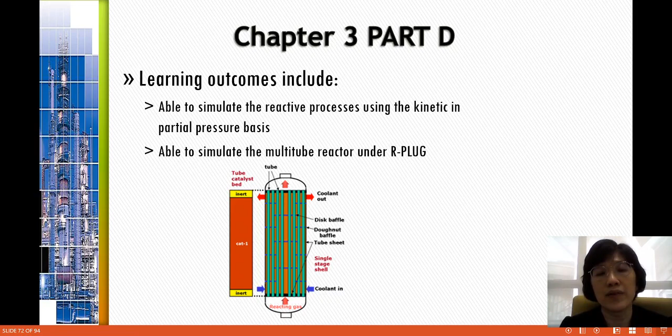Today we are in the last section for chapter 3 on the simulation of reactive processes. So for the last part of chapter 3, we have 2 learning outcomes. So let's refer to the slide. So the first outcome is you should be able to simulate the reactive processes using the kinetic in partial pressure basis. And second, you should be able to simulate a multi-tube reactor using the RPlug model in Aspen Plus. So referring to the figure below, it is actually a multi-tube reactor, and the tube in red color is actually one of the tubes inside the multi-tube reactor.

So the content for the lecture today, or for you to achieve the outcome today, is through exercise 3.7. So we have the case of glycerol dehydration. Okay, first to acetol, and then acetol will then be hydrogenated to propanediol. I think this case is similar with the case that is given in exercise 3.2, but in exercise 3.2 we'll be using only RStoic, and here for this example 3.7 we'll be using RPlug because it is being carried out in a plug flow reactor.

Okay. So as mentioned, there are 2 reactions as represented in equation 1 and 2. We have glycerol dehydrated to acetol. Acetol will then be hydrogenated to propanediol. That's why we need hydrogen in the process. So of course our desired product here is 1,2-propanediol. So the rate equation for these 2 gas phase reactions is given in equation 3 and 4. As mentioned, it is in terms of partial pressure basis. P is partial pressure in the unit of kilopascal. K is the rate constant in the unit of kilomole per meter cube per second.

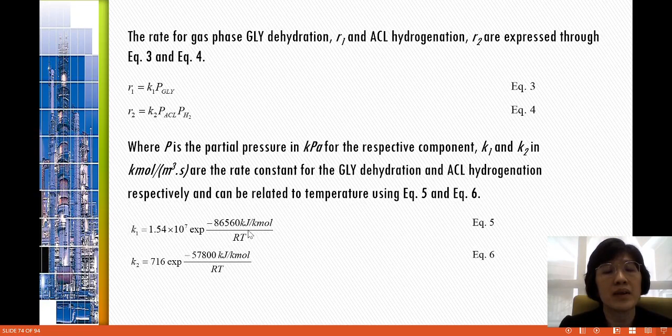So for the feed, the crude glycerol consists of 70% of glycerol and the balance of water, and it is feeding into the system at the flow rate of 1 kilomole per hour and mixed with 5 kilomole per hour of hydrogen before it is entering the reactor with the dimension of 5 cm in diameter and 200 cm in length. The feed temperature and pressure are 200 degrees C and 1 bar respectively, and the reactor is operated at the same condition as the feed.

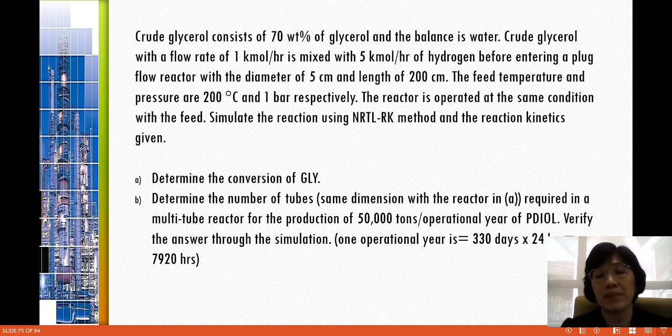Your task now is to simulate the process using the NRTL-RK method and determine first the conversion of the glycerol, second the number of tubes in a multi-tube reactor if you would like to produce 50,000 tons per operation year of propanediol, and with the number of tubes calculated, you need to verify the answer through the simulation. So there is a note given here. 1 operation year is actually equal to about 7,920 hours. How to get this number? We use 330 days multiplied by 24 hours because we assume 30 days, about a month, is used for maintenance purposes in the plant. Let's analyze the problem.

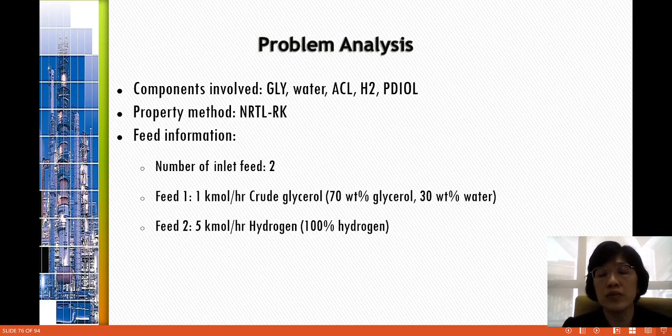So as usual, we have to list down the components. So the components involved are glycerol, water, acetol, hydrogen, and also propanediol. And the property method given is NRTL-RK, because I think it involves liquid initially, then we also have the vapor phase in the reactor. For feed information, there are two feeds. Feed 1 is glycerol, 1 kilomole per hour with the composition of 70 weight percent of glycerol, 30 weight percent of water. And feed 2 is pure hydrogen, with the feed flow rate of 5 kilomole per hour. So you have feed 1 and feed 2, meaning before entering the reactor you need a mixer.

So the reaction information given here is we have the rate equation in terms of partial pressure. Obviously this is a gas phase reaction, because normally when we have a gas phase reaction, the kinetic is expressed in terms of partial pressure. And we have to use RPlug here, okay, because the kinetic is given and it's a plug flow reactor. For the phase in the reactor we choose vapor-liquid because initially the glycerol is in liquid phase, but later on it is changed to gas phase in the reactor if it's in the real plant, right? At normal temperature and pressure, glycerol is actually in liquid phase. So to be safe, we choose vapor-liquid for the reactor valid phases, and the reactor operating condition is just the same as the feed.

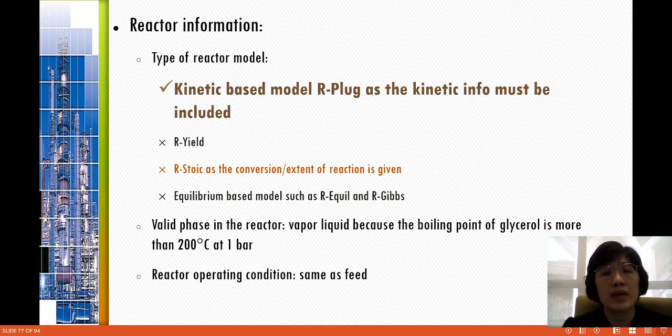Okay, now let's solve the problem. We have the first question: determine the conversion of the glycerol. So as usual, we have to list down the components, then we have to choose the property method.

So in the case where the reaction phase is not given, because in this question it's given, it's saying that the reaction happens in vapor phase. But if it's not given, you can actually check the boiling point of the components in the list of components. Okay? Under the list of components, you have to click review. Once you click on review, the properties table will be given to you, and TB here refers to the boiling point of the component at atmospheric pressure.

Okay, bear this in mind. This TB, the boiling point stated here, is actually the boiling point for the component at atmospheric pressure. So if the operating pressure is increased, then the boiling point of the component, of course, will be increased. You can also predict it using the Antoine equation if your operating pressure is higher than atmospheric pressure.

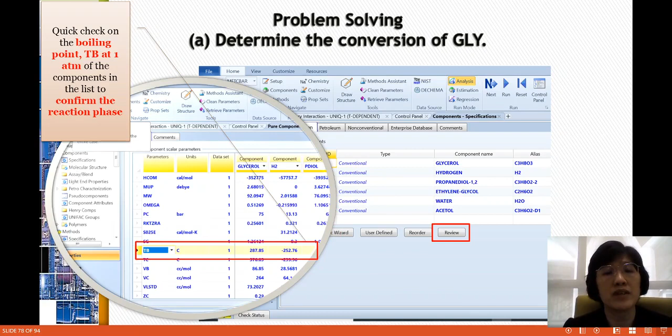So once you have done that, from the property environment you shift to the simulation environment. Here you have to construct the flow sheet. As usual, put in the blocks. As I said, you need a mixer to mix the crude glycerol with hydrogen before the feed enters the reactor, R101. You have to choose RPlug. Once you put in the appropriate blocks, you have to connect the blocks with streams. S1 here refers to the crude glycerol, and S2 is the hydrogen.

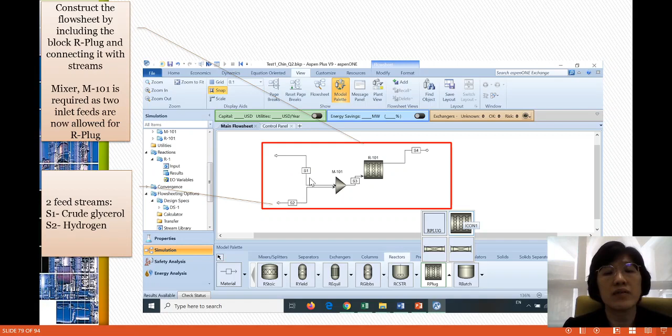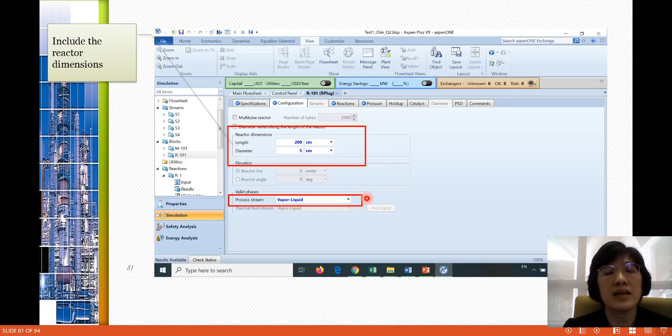Next, you have to include the reactor operating condition. You just choose that the reactor is operated at constant temperature, 200 degrees C, and no pressure drop, meaning the pressure of your reactor is the same as the pressure of the feed. Once this is done, you shift to configuration and put in the dimensions of the reactor. We have length and diameter given as 200 and 5 cm. The valid phase here, I have chosen vapor-liquid.

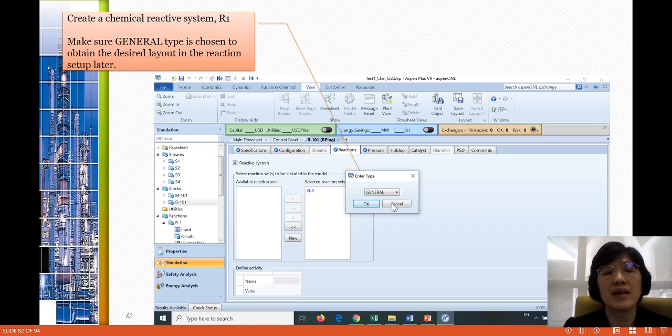Now you have to include the reaction details. Just click new and a new reaction set will be created, R1, and you have to enter the type. Make sure you choose the type general. Don't choose anything other than general. Once this is done, just click OK. If you don't know which step to go to, you can click the next button here. Then you'll be guided to this reaction 1 folder to include the reaction details.

As given in the question, there are two reactions. First is glycerol dehydration, second is the acetol hydrogenation. So just put in the chemical equations accordingly. One mole of glycerol produces 1 mole of acetol and 1 mole of water. For the second reaction, 1 mole of acetol reacts with 1 mole of hydrogen to produce 1 mole of propanediol, right? So PG here should be PDIOL. This is the old file; I copied from the old file. The new file is revised with PDIOL. Can you see this one?

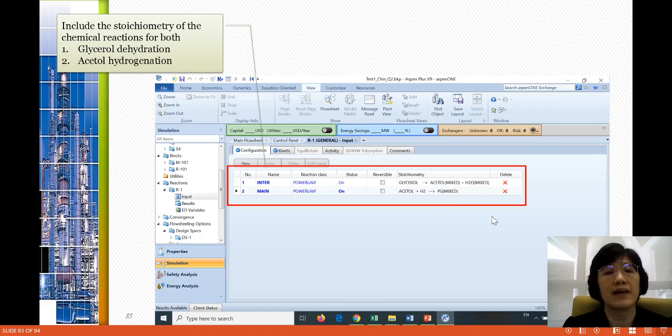Now, with the chemical equations given in the configuration tab, just click next. You will be guided to the kinetic section. There is a drop-down list with two reactions. The first one is glycerol dehydration. Just choose vapor phase, and the basis of the rate equation is partial pressure, remember, and the unit for your pressure is kilopascal. Make sure you have chosen the correct one, and the unit for rate is kilomole per cubic meter per second. You can just leave this.

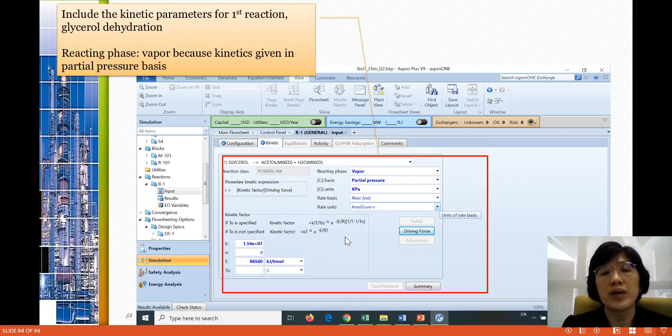And we have a K value given in the Arrhenius equation, the pre-exponential factor here, and also the activation energy given in the question in terms of Arrhenius equation. And once you have done this for reaction 1, you have to put the driving force, the order of reaction. It is first order in glycerol.

Okay. Once this is done, just close and include the kinetic for the second reaction, the acetol hydrogenation. Just put in accordance to the kinetic given in the question, and remember to put the order of reaction through the driving force section here. Remember to do this. And just to remind you, this is a very common mistake among the students. Students always forget to include the driving force, and this will result in a wrong simulation output.

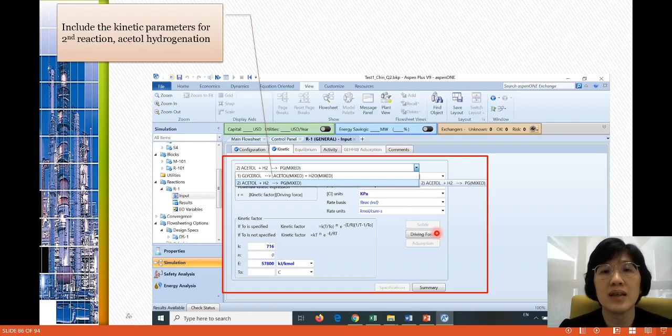So once this is done, remember our task is to calculate the conversion after the simulation. What you need to do is run the simulation, get the result under stream result. This is the stream result. Again, you have to check the glycerol conversion. Okay? Conversion is always referring to the reactant conversion.

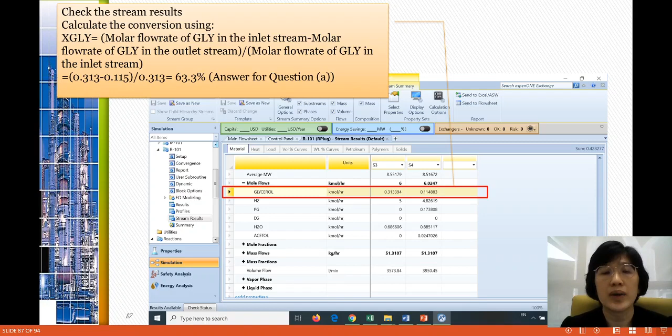So we have S3 and S4. This is inlet and this is outlet. S4 is the outlet stream. So glycerol here, we have the inlet stream for glycerol and outlet stream for glycerol. Just put into the equation for conversion, and the resulted conversion is about 63.3%. So this is the answer for question A. So let's move to question B.

You have to determine the number of tubes in a multi-tube reactor if you would like to produce 50,000 tons of propanediol in one operation year. Before you do anything, you have to change the number of hours in one operation year to 7,920. So just go to setup under the simulation environment, setup. So here there is a term called operational year. So just edit the number of hours here to 7920 hours.

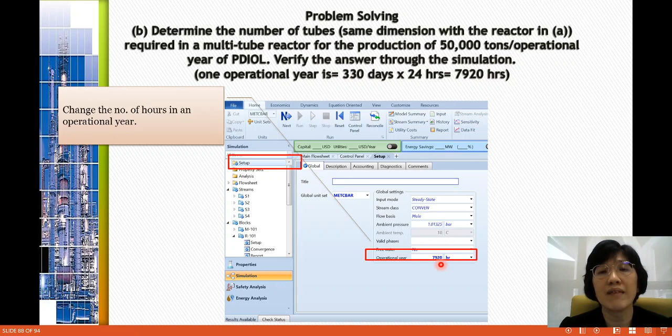Once this is done, then you have to go and check. I think before that you have to run the simulation again using the file just now. Okay, reset and run the simulation again. Then let's check the propanediol in one tube. Okay, and the unit, the mass flow unit is tons per operation year. So it is 115.467 tons per operation year if you use one tube.

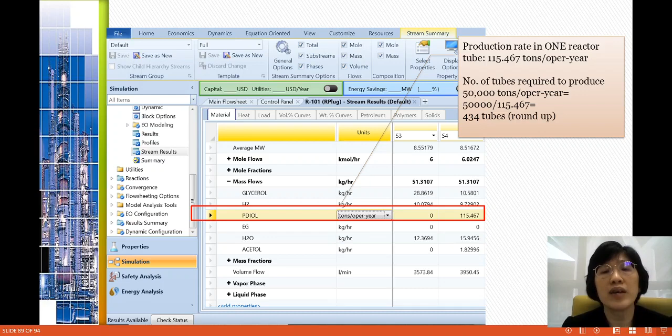Now you need 50,000 tons in one operation year. So you have to use 50,000 divided by 115.467. You get 433 point something. But we have to always round up because number of tubes must be a round number. So we round up to 434 tubes. So with this, we have to proceed to verify using the simulation. So meaning the answer is the number of tubes required to produce 50,000 tons of propanediol in one operation year is 434. So put this into the simulation and verify whether you can get this 50,000 tons per operation year.

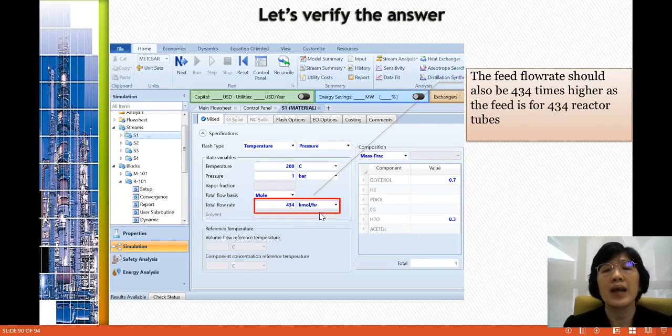Now, if you want to produce more, of course you have to feed in more, right? So make sure your feed flow rate now is 434 times higher than the original one. So for glycerol, instead of 1, now you have to use 434 kilomole per hour. And for hydrogen, instead of 5, now you have to use 2,170 kilomole per hour. It must be 434 times higher than the original.

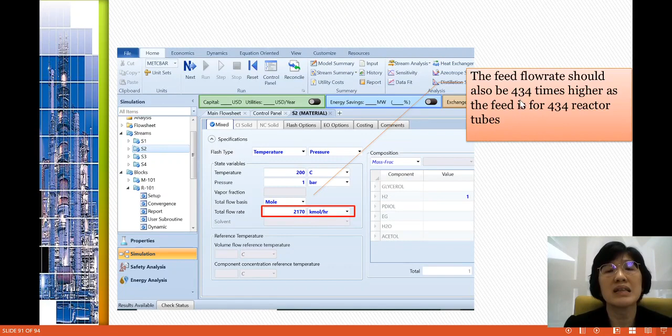And now, in the reactor configuration, you have to check the multi-tube reactor and then include the number of tubes here, 434. Okay, the rest is the same. So with this, I think all the required info is completed. Just run the simulation and check the result. So under the stream results, again under the block of reactor R101, check the result.

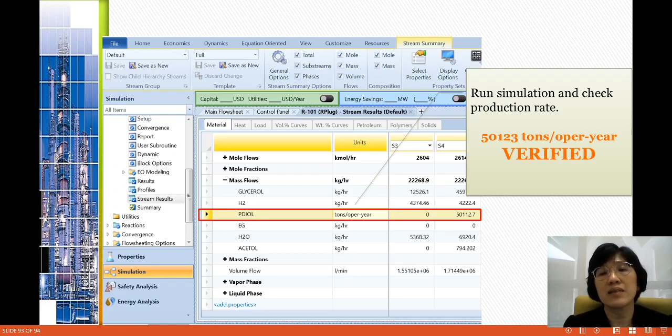In terms of tons per operation year, you are getting more than 50,000. Okay, it's about 50,123 tons per operation year. Now we verified that we are getting at least 50,000 tons per operation year of propanediol using a multi-tube reactor with 434 tubes. Okay, so this is the answer for question B.

So with this, I would like to thank again for your attention. I hope you can at least bring two outcomes back home. One is you should be able to simulate the reaction with the kinetic in terms of partial pressure basis. Okay. Second is you should be able to simulate a reaction in a multi-tube reactor.